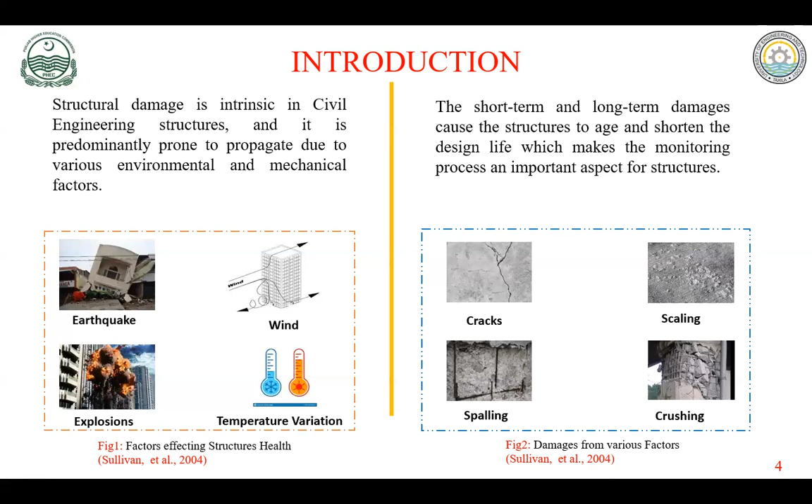Unfortunately, last month we witnessed the severe earthquake in Turkey and Syria, which caused more than 40,000 human losses, and damaged the infrastructure and development. So we can well imagine how these actions will impact. Now, what are their reactions? We have some short-term and long-term damage reactions to these external agents. Sometimes we have very minor cracks on structures, which we name temperature cracks. Sometimes we have spalling of the concrete and reinforcement, especially in structures very close to the marine environment. And sometimes we have crushing of the concrete against the lateral loads.

In this slide, I'm going to compare two nations. The first, America, has a rich history of development. It's right now the current superpower of the world. So in America, we have more than 570,000 bridges. And more than 40% of bridges are classified as deficient, requiring rehabilitation as per the Federal Highway authorities. If the US government and different states are going to repair these bridges, they need more than $50 billion per annum.

Compared to Pakistan's statistics, we have around 75 years of independence, and we have around 6000 bridges during this lifespan of our country. More than 30% of them are reaching their design life. A bridge management unit is already developed in the National Highway Authority for the monitoring of these structures. And if the government decides to rehabilitate, re-strengthen these old, damaged bridges, it needs more than 70 million dollars per year.

Now, what are the problems when we are going to inspect the bridge or the highway? So here are some demerits of the conventional methods. First of all, you have to stop the traffic flow on the bridges. We have to go down and see all around the crack patterns around the critical regions of the bridge piers.

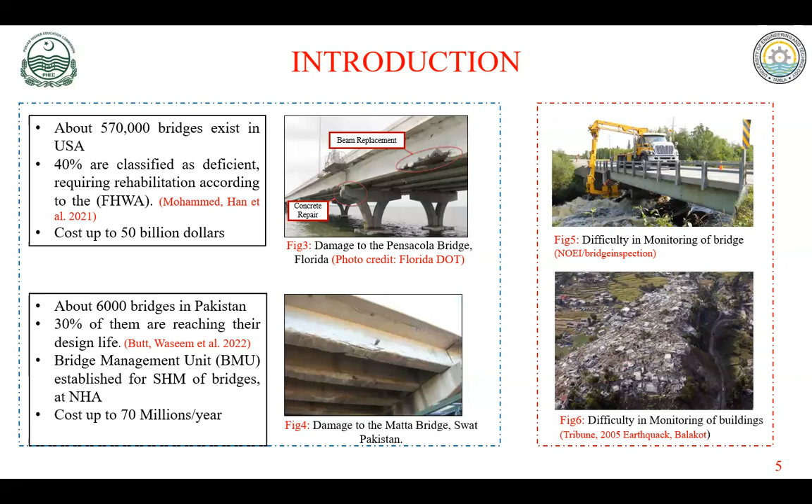Now, before going towards the proposed methodology, I would like to highlight the merits and demerits of the current practices. The first one is the visual inspection of these old bridges, infrastructures or buildings. These visual inspections are based on human interpretation.

For example, if a structural engineer has an experience of 40 years, the cracks talk to that senior person in a different manner compared to a person like me with 15 years of experience, or a fresh graduate like you investigating that problem. So that crack has a different meaning for all of us.

Also, the problem with human inspections is that the knowledge transfer is not documented. If I make some argument based on my experience, I cannot justify it. I say, okay, this is my experience. So we do not have proper documentation for these visual inspections.

After that, the researchers and authorities proposed some non-destructive testing. But again, this apparatus has some limitations, like the Schmidt hammer and X-rays. And then automated inspections: we have some sensors, and with the help of drone technology, we can use these things for inspections. But the problem with the sensors is that they are very costly.

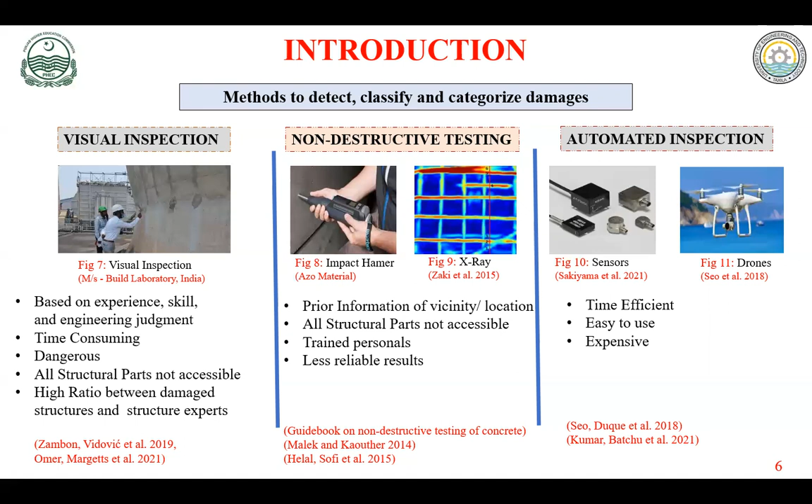They require very little time, but they are very expensive. And in a developing country like Pakistan, we cannot afford these sensors. So we have the option of using normal drones and making our own codes and database for the prediction of these cracks.

Now, let's discuss how we can define structural monitoring in a simple approach. Structural monitoring is a process of evaluating the performance of an engineering structure by detecting and localizing damage and proposing suitable techniques as a remedy for the damage. Again, I'm going to give an example of a human body.

If a person is unfortunately suffering from cancer and the doctor diagnoses it at an early stage, the first or second stage, the doctors have a good chance to give good medicines to remedy the disease of the patient. However, if a person comes to the doctor at the fourth, final stage of cancer, the doctor doesn't have many resources, much time, or many options to remedy the problem.

In a similar manner, the structure behaves. If a structural designer detects the disease of the structure, why the structure is showing these signs, and what the causes are, the authorities and designers can rehabilitate these structures in a much cheaper way and in less time, compared to when we have a very demolished structure that we cannot rehabilitate.

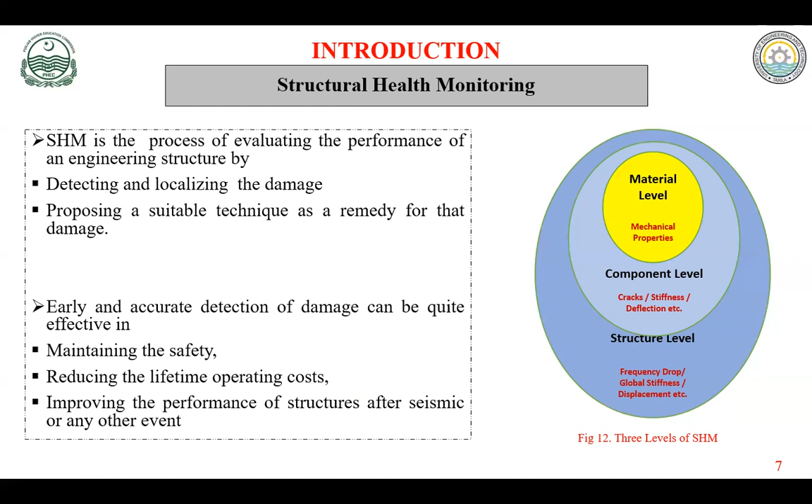Normally, structural monitoring has three levels: the material level, the component level, for example beams and columns, and the structure level. But with the time constraint of this seminar, I'm going to only discuss the material level. So this is a summary of different tests as per the ASTM codes for predicting the compressive strength and mechanical properties of concrete and steel.

First of all, we have destructive testing. We cast some cylinders in the lab, or if we are going to assess an old structure, we have to cut some cores from the structure and conduct compressive testing on these samples. The disadvantages of destructive testing are that curing is done in a different environment, and taking concrete cores is always costly and damages the concrete structure being tested.

Then we have some non-destructive tests, like the rebound hammer test, UPV, and electrical resistivity measurements. These apparatus are very costly, and the results are not as accurate as destructive testing methods, having plus or minus 20% reliability with respect to the estimated results.

For steel, we can use GPR methods and electromagnetic methods. For data collection, we need a good amount of time to calculate the data, and they do not work well in dense rebar areas, for example tunnels, retaining walls, and slabs.

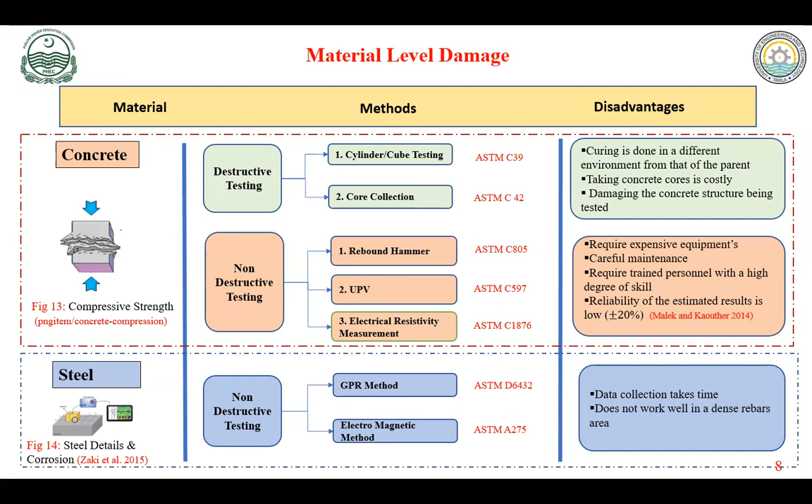To overcome these problems: now we have issues that the sophisticated apparatus are very costly. We cannot afford them. So that's one issue. The available methodologies take a lot of time, and their accuracy is not up to the mark. So now we have a problem where we have to propose a new methodology which is affordable, as well as giving more accurate results, and also all the interpretation of the results are well documented for the generations of engineers.

Now, why do we need a smart integrated system? In order to answer all of these questions which I mentioned right now, we need a smart integrated structure monitoring system. Due to several shortcomings in the existing techniques, interest has gone towards damage detection techniques based on structure monitoring and the smart integrated structure monitoring system. Recently, with the advancement of high-performance CPUs, GPUs, smart techniques, UAVs, unmanned vehicles, drones, and especially the development in the mathematics of artificial intelligence and image processing, these are now the attracting domains all around the globe for proposing solutions to conventional problems.

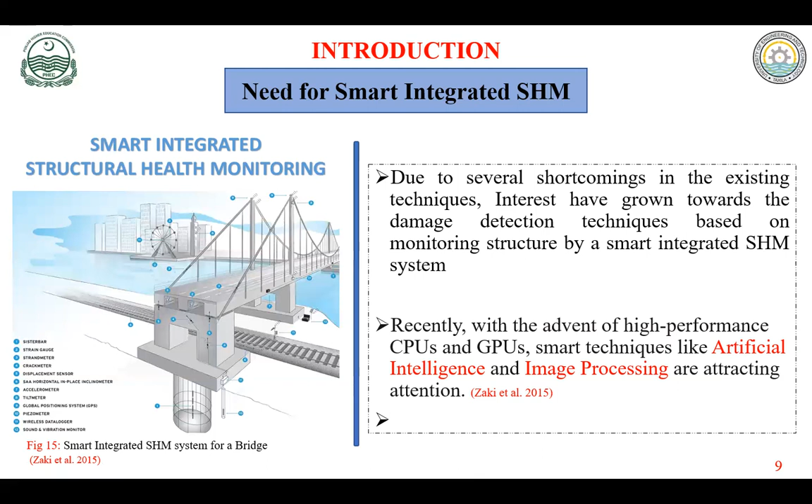Now, before going to discuss the research methodology, I'm going to bore you with some basic definitions of image processing, how it works, and what artificial intelligence is. These 4 or 5 slides are basic introductions to these two domains, and they are very helpful for people who are going to think about artificial intelligence. Especially our final year students can think about how to use this knowledge to solve their FYP projects.

Now, what is image processing? In a simplified manner, the definition of image processing is that you can transform any type of data into a number. If you have a picture, an audio signal, or a video signal, you can convert all these things into pixels, into numbers, and when you have numbers, you can perform mathematical functions. So image processing is a method to perform some operations on an image in order to get an enhanced image or to extract some information. In digital imaging, a pixel, a picture element, is the smallest item of information.

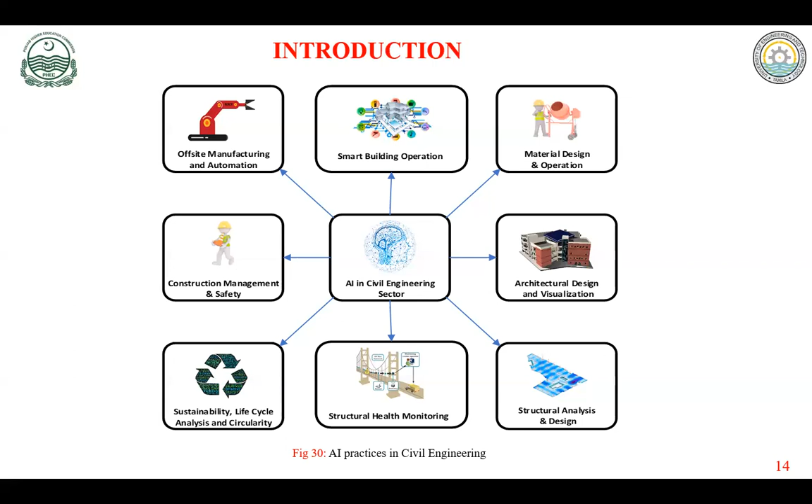Right now, in the last year, when I got this Punjab PHEC funding, I got 2 full-time scholars with me, and they are teaching me about CNN, ANN. So learning has no age, it has no stage. You can learn at any stage, and people like you have more resources than us.

Now, I'm also going to show some literature review about structure monitoring, and especially the progress with respect to the Pakistan research environment. And I also wanted to highlight some gaps. And you know that if you have a gap in a certain area, you have a good chance to polish yourself, to make your own world, to make your own name.

So in the 1910s, after the construction boom, the cement compositions in the 1920s, there was a boom in the 1930s and 40s in reinforced concrete structures. And when you have concrete structures, you also have to worry about their strength, the supervision problems, their design lives. So in the 1930s, the developed countries conducted structural monitoring on concrete and on steel in 1937.

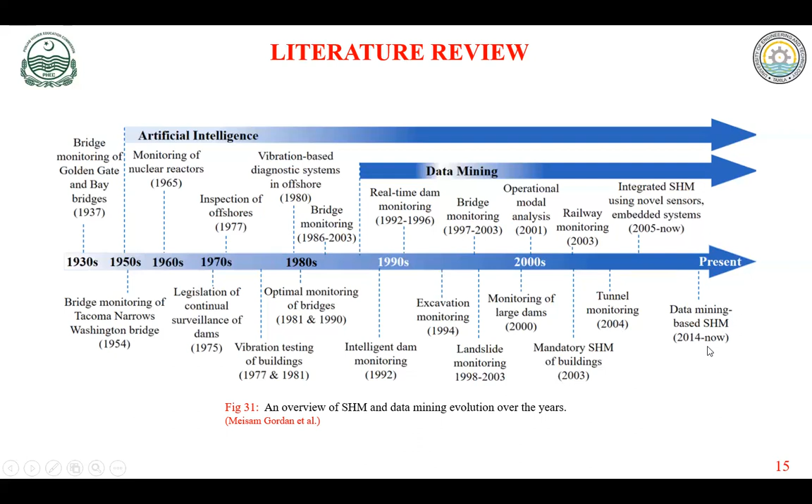And then they changed from visual inspection towards the vibration-based diagnostic system in the 1980s, and then real-time monitoring of bridges and dams in the 1980s, excavation monitoring in 1994, landslide and tunnel monitoring in 2004, and now is the age of data mining-based structural monitoring.

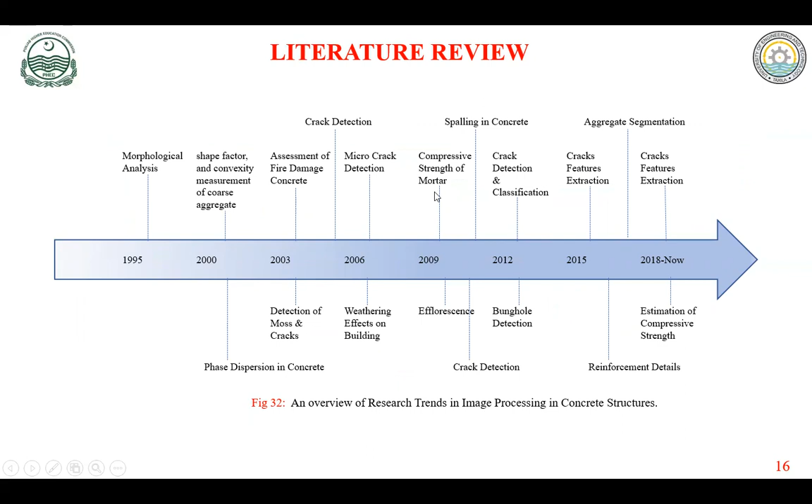So this is an overview of research trends in image processing of concrete structures. It started in 1995 with morphological analysis, shape factor measurement, assessment of damage, fire damage, microcracks, compressive strength of mortars, efflorescence, and now estimation of reinforced concrete compressive strength.

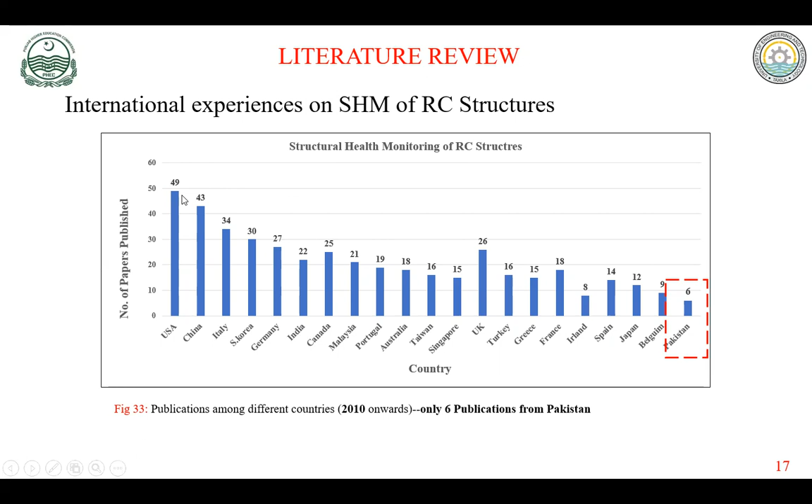So if we collect the database from Science Direct, which is a reliable source of research publications, in the last 10 years Pakistan only published 6 significant or impactful articles available on Scopus and Science Direct in the field of structural monitoring or reinforced concrete, unlike India, which published more than 22, and America has 50. So there's a lot of gap in this area, especially for civil engineers who have the intention to use AI.

Now, what is our proposed methodology for these problems, which I highlighted in the last slides? So we are going to use drones and the power of the GPU for image processing CNN training in order to develop a small mobile app.

So if you're working in C&W, Pakistan PWD departments, in NHA, in any private sector, and you're going to monitor some bridge, pavements, or reinforced concrete structures, and you have just your own mobile, you just capture some pictures at a specified distance, and you're going to predict the width, the length, the orientations, especially for areas where humans cannot go and need a lot of scaffolding, elevation problems, undersea, above sea issues. So you can use your drones for predicting these things.

So we developed a database. We downloaded some database from American universities, and also we created our own database of 32,000 images. We divided 8,000 images in horizontal cracks, 8,000 vertical cracks, 8,000 diagonal cracks, and 8,000 uncracked images.

Remember, these cracks look similar to people from the electrical or mechanical domain, but these cracks have different meanings for a civil engineer. For example, if you have a horizontal crack, that means you have a debonding issue between concrete and steel. If you have a vertical crack, that means your member is going to fail in a flexure manner. If you have a diagonal crack, that means your member is going to fail in a shear manner. Sometimes vertical cracks convert into diagonal cracks, or diagonal cracks into vertical cracks. So you have to be smart in order to identify these cracks.

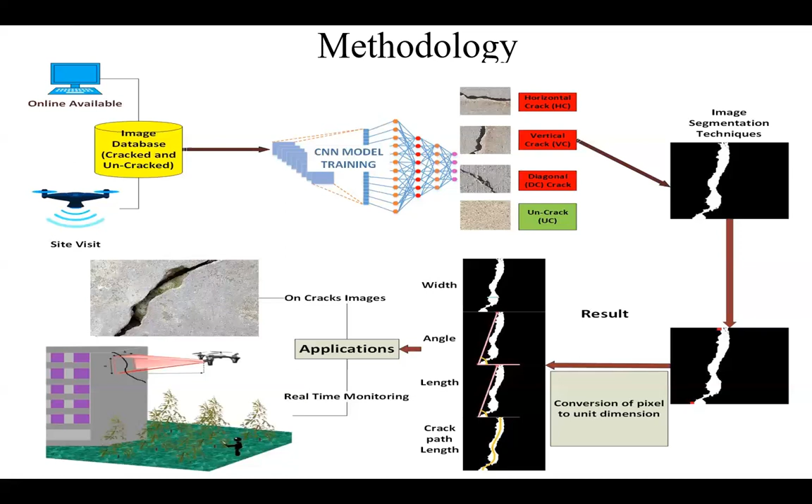So when you identify these cracks, that will be very helpful for you to diagnose the problem of the members, and also to propose remedies for these problems. So after classification of these cracks, another challenge for us is to find out the characteristics of these cracks. What is the maximum width of this crack? What is the maximum changing angle? What is the length of this crack and the crack path?

So our current project will give you the opportunity to predict the cause of the failure, the extent of the damage, the rehabilitation methodology, and also we are going to embed these algorithms in drones. We are working on the application phase right now, and hopefully in a couple of months we are going to launch our app on a trial basis for the authorities in order to assess all bridges or buildings.

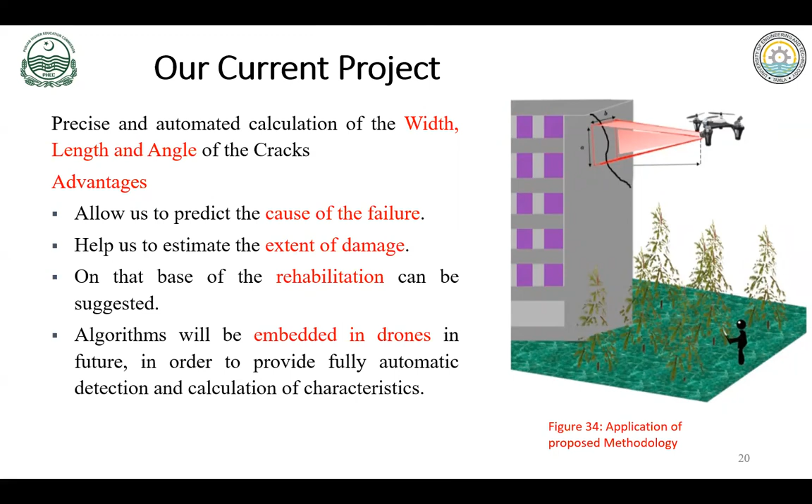Now, in order to find out the characteristics of the cracks, we took some images from around our campus in UET Taxila, and we marked a scale of 1 foot by 1 foot, and then we measured some cracks by hand, as shown in image 1, image 2, image 3: the angles, the slope, the orientation.

So these are real characteristics of the cracks. And then we applied some image processing operations on these cracks and found out the width, the crack, the accuracy paths, and these are some results. So our algorithm predicted the angle of 5.81 instead of 6, 16.66 width instead of 20, and 305 millimeter length instead of 310. So we have these differences between the measured images and the predicted images for image 1, image 2, and image 3.

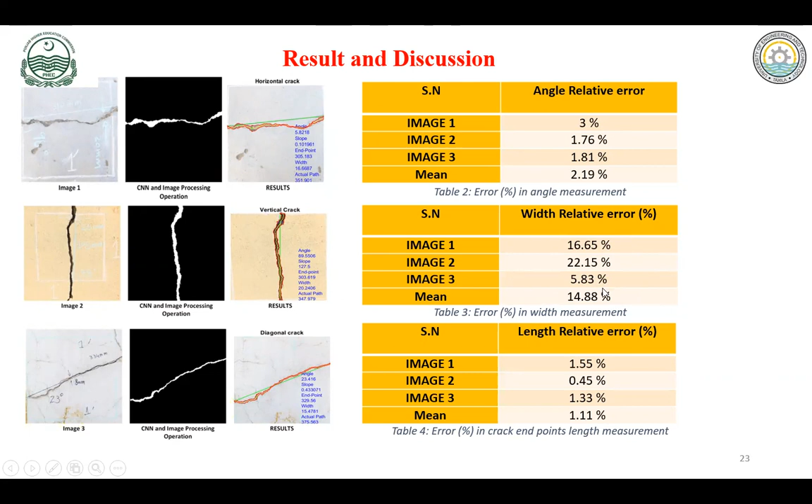The last thing is I'm going to show you a small video of how in real time you're going to predict the characteristics of the image. Now, the previous researchers only predicted the crack length, where the crack started and where the crack ends, as shown by the green line. But you can see the previous researchers' work has some limitations because we do not have straight cracks on our concrete surfaces. So to overcome this problem, we propose a new methodology that measures the actual crack length along the path of the crack, which is highlighted as the yellow line.

And you can see that if we measure end-to-end crack length in the previous 3 images, image 1 has 305, however, the actual crack path is 351. Image 2 has 303, however, the actual path is 347. Image 3 has 329, however, the actual path is 376. So if you follow the crack path, it has more length. Obviously, it is not a straight line. It has some zigzag patterns, and the percentage error is around 14%.

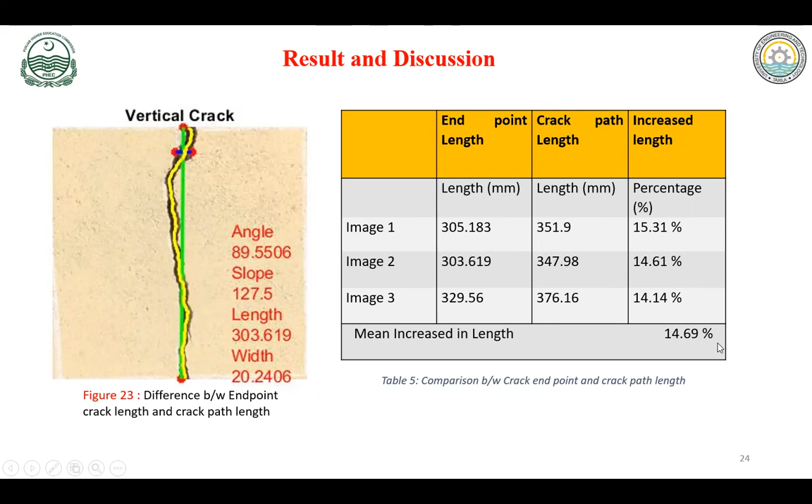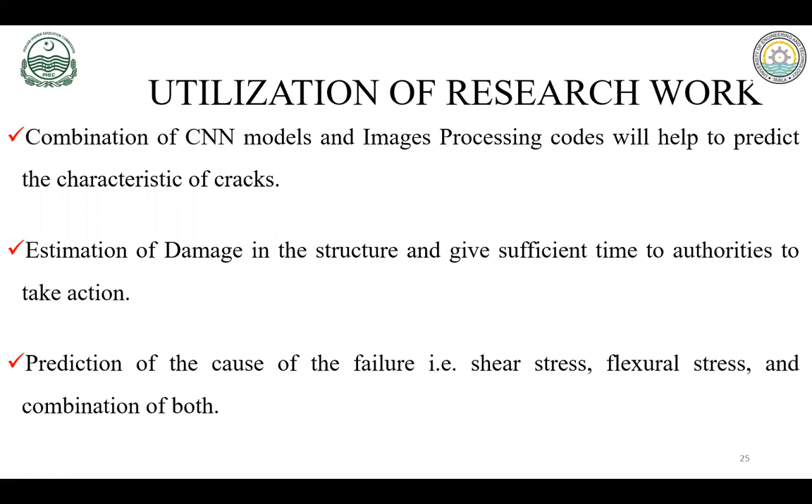So the combination of the AI models and image processing code will help us to predict the characteristics of cracks, estimate damage in structures, give sufficient time to the authorities to take remedial actions, and predict the cause of the failure, either shear, flexure, or a combination of both, depending upon the nature of the cracks. So let's see a small video, and then I'm going to take your questions.